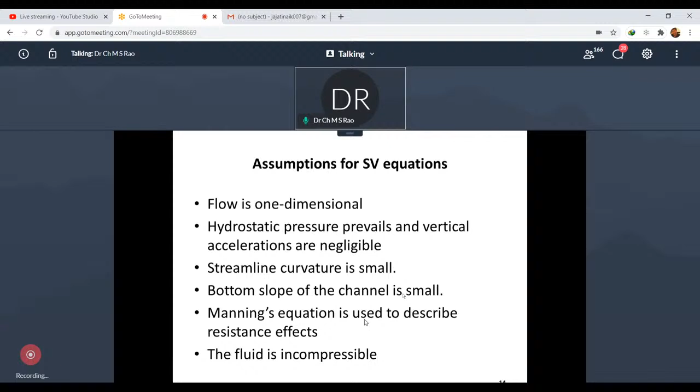Okay, and the Manning's equation is to be used. That means you are considering the surface roughness variations, vertical roughness variations, and the longitudinal roughness variation also can be considered in this particular equation, and the fluid is incompressible. So these are the assumptions that we usually adopt in these particular mathematical models.

So here, considering the various combinations of various floods, I'm giving a comprehensive summary here. So based on the momentum equation components, I can classify these things.

Of course, Professor Subhankar Karmakar from IIT Bombay has defined it like this, and many people are defining it like this in his NPTEL lecture. I've taken it from there, but whatever was told, everybody is saying the same.

So when SF equals S0, it is a kinematic wave, a steady uniform flow you expect there. When SF equals S0 minus del Y by del X, the flow depth variation, water level variation in the longitudinal direction, this pressure variation causes the non-inertial form, that is called diffusion and diffusive wave. And with S0 and the local convective acceleration, if you only consider ignoring the local acceleration, then you can say it is steady non-uniform. And if you take all terms, we say it is unsteady non-uniform flow, or a dynamic wave.

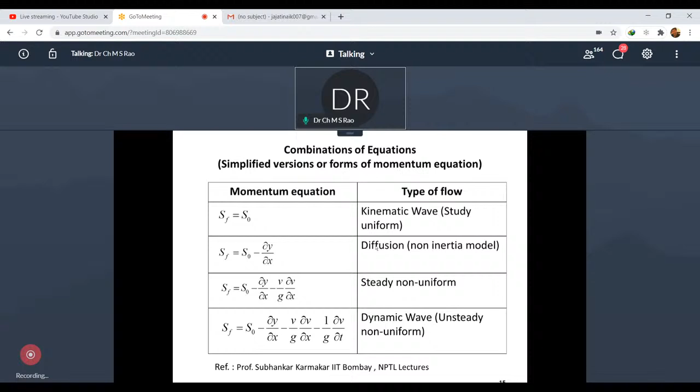These are the main flood waves, based on the momentum equation, derived from this St. Venant equation. As I told you, the gravity wave is only the flow of waves occurring on the top layers of the streams at a particular height due to slopes. For a zero slope and a considerable slope, these waves occur due to gravity forces prevailing in the particular river reach.

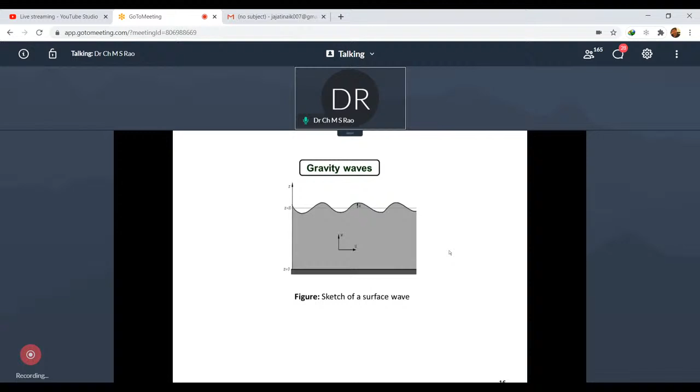This is the gravity wave. So you can now use this St. Venant equation and convert it into some other form also. Here I'm highlighting the dynamic wave into the conservation form. I'm replacing the del Y by del X with Y, the flow depth is replaced with the discharge. So Y and Q are interlinked, they have a proportionality relation, remember. So you can replace Y with Q and name it a conservative form.

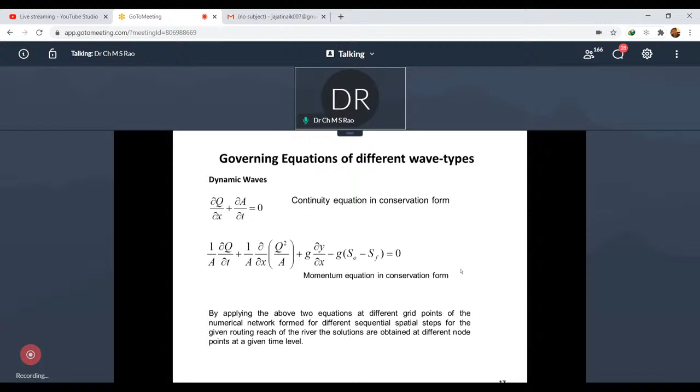Okay, whenever you use the discharge, that means you are explaining and calculating the volume of flow of the flood at the downstream side. Hence, it is a conservation form of the momentum equation and conservation form of the continuity equation. This is the one shape I would like to bring to your notice. Therefore, I brought this equation to my slide.

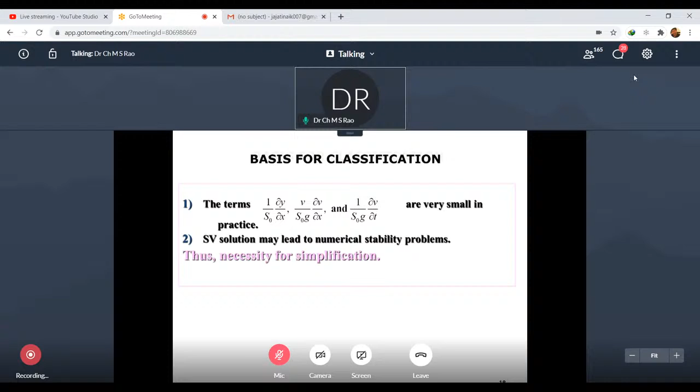So as I already told you, 1 upon S naught del Y by del X plays a key role, that means water surface gradient, the flow depth variation with respect to bed slope. Slope may be high, slope may be low, I will explain that more clearly. This term is very small, and that causes some instability in the St. Venant equations. They have to be taken care of while using these methods to compute the flood peaks at the downstream side.

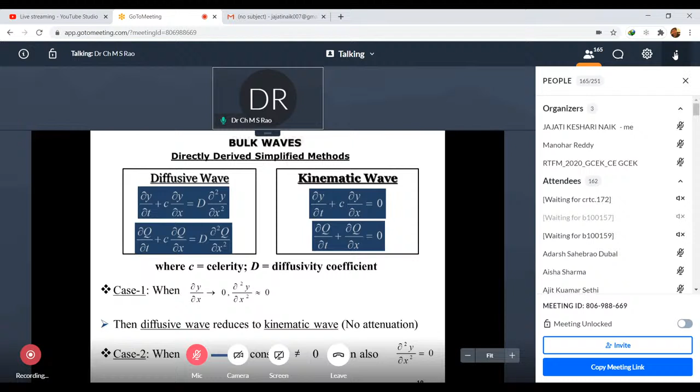Now, the other forms of these bulk waves are the derived equations of the St. Venant equation, and we name them simplified methods because the original equation is transformed using other mathematical functions and approaches. That gives certain forms, which are only used to estimate floods. Therefore, we call them simplified methods. You might use binomial series to change the original form, or Taylor series to convert into a finite difference scheme. So you are simplifying the original equation into a derived form, which has a shape that is used in the model to develop the algorithm and estimate flood peaks. Hence, those methods are called simplified methods.

Simplified diffusion waves have the celerity component as a coefficient, and also a diffusivity coefficient in this term. Whereas in a kinematic wave, as I told you, the diffusion wave ACD equation, the approximate convective diffusion equation, is a transition phase of a kinematic wave. So this diffusion term or diffusivity coefficient can be ignored when del Y by del X tends to zero. That is one case study we have seen. In that scenario, the higher order terms can be ignored, and under such situation, the diffusion wave can be converted into a kinematic wave. This is the transition phase of the mathematical function.

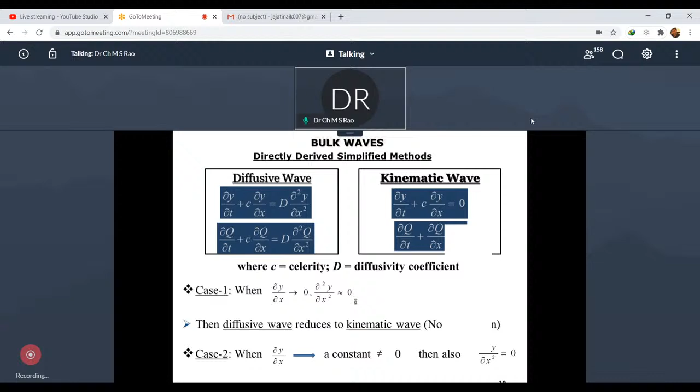So with this scenario, the ACD equation in conclusion shows that 1 upon S naught, del Y by del X, plays a key role, meaning the flow surface profile plays a key role in defining flood waves. This theory was proposed by my professor, my guide, along with his research scholar, and initially proposed by his own teacher, Professor Ranga Raju, who wrote many books on open channel flow and was vice chancellor of University of Roorkee, now IIT Roorkee.

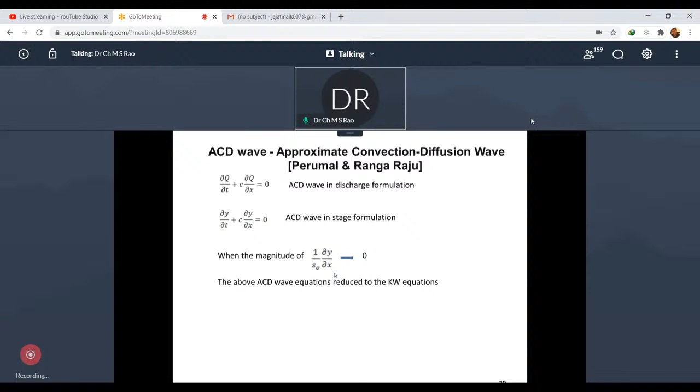So with this brief—I cannot say brief, it is a wide, lengthy discussion—we can now categorically define the various types of flood routing methods into three major groups.

One is using the ANN model, black box models. My student, Mr. Reddy, who is presently a coordinator, has done some work under me using empirical regression black box models—his results I will explain in my results chapter. Under my guidance, Mr. Reddy used a genetic algorithm approach to estimate floods, which I call a black box model. You give one input and get an output. By trade-off, you develop a weighing factor to match computed values with observed values, minimizing errors in the model. Finally, you get the computed values, calibrated values, which can also be used for validation. That's what people widely do using the ANN model, an algorithm-based model.

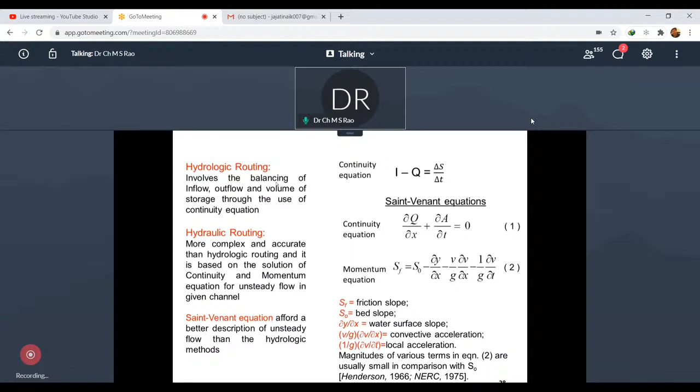So hydrological models in general, we call them time invariant models. They usually use the continuity equation, remember. That means the change in storage with reference to time is calculated by taking the difference between the input and the output. That's why hydrological models usually use only the continuity principle, remember.

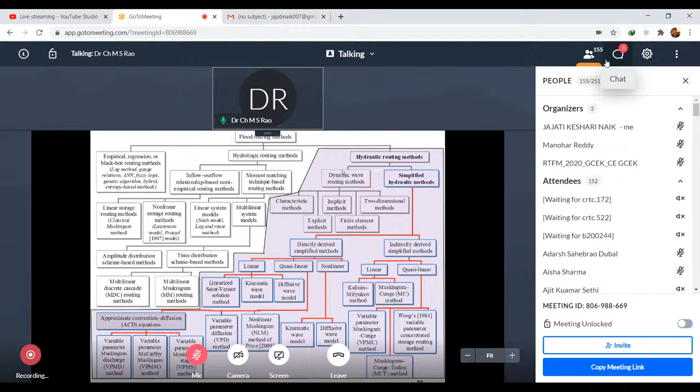Now when you go to the hydraulic models, we have categorically defined them in many ways: one is the dynamic wave, another is the kinematic wave type. There also we have categorically defined the methods in simplified modes, where the Saint Venant equations are directly used or indirectly used. In the directly used methods, we take the continuity equation and the momentum equation and use them in linear form and quasi-linear form.

It apparently is linear, but it is not linear, that is called quasi-linear. It means it is a non-linear phenomena, but not really non-linear, remember. So when you take a linear equation in one-dimensional flow and derive it to a certain form, we can maintain the non-linear flood behavior in a linear mode, so we call it quasi-linear. In that scenario, we have developed the variable parameter methods in a quasi-linear approach, finally developing the VPMM method by deriving the quasi-linear derivatives directly using the Saint Venant equation.

Apart from that, indirect methods also exist, such as the Kalinin-Milyukov method, where we use a particular storage equation with a kind of nonlinear approach, a power term, using some parameters in the nonlinear mode, and we optimize each and every parameter, computing the discharges at the downstream side indirectly. That is also a hydraulic routing method using the indirect approach.

With these major classifications, whatever is shown here, you will come back to class. Whatever method you see in the world now, it falls somewhere in this particular block diagram.

When you go into more details of the models, particularly VPMM etc, I want to remind you that the water surface slope defined along the reach, flow depth variation with reference to the bed slope, has a functional relation with the bed slope S naught, the surface characteristics meaning roughness, the initial flow depth available at that time, the initial discharge available at that time point, and also the time to peak of the flood and the peak discharge QP. That means the flood wave characteristics fully depend on the physical characteristics of the river.

That is very important. Any model developed based on these physical characteristics, we call a physical model. Whenever you use ANN and black box models, you don't talk about all these parameters. You don't bother about the surface characteristic of a river at that section, whether roughness is high or low, you don't know. The bed slope, whether it's high or low slope, you don't know. The initial base flow at that river location or basin, you also don't know. And the peak discharge, peak flow, how much it is, you don't know.

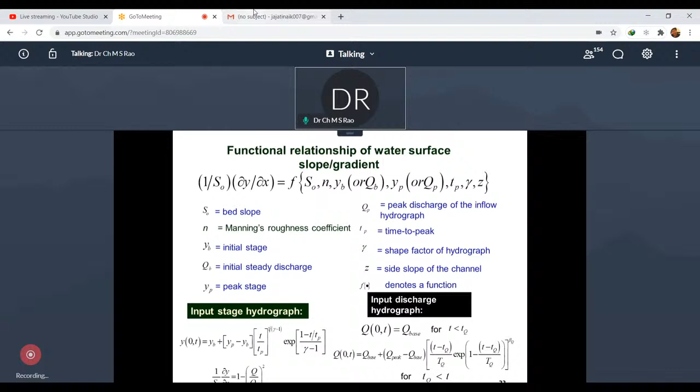And the symmetry of the flood, whether it is symmetric or asymmetric, whether it follows a gamma distribution or beta distribution, the shape or skewness of the flood, whether skewed right, left, or symmetric like a normal distribution - these characteristics of the flood you also do not know in the black box model. But still they are very popular because the weighting component governs at different layers to match the computed value mostly with the observed, recorded values.

And there you are trying to minimize the error using many algorithms like the Kalman filter techniques for reducing the error, or AR2 auto-regressive models, etc., or extended Kalman filters. There you are using these to reduce the error in the model. So therefore, they are also popular, but they are non-physical models, remember.

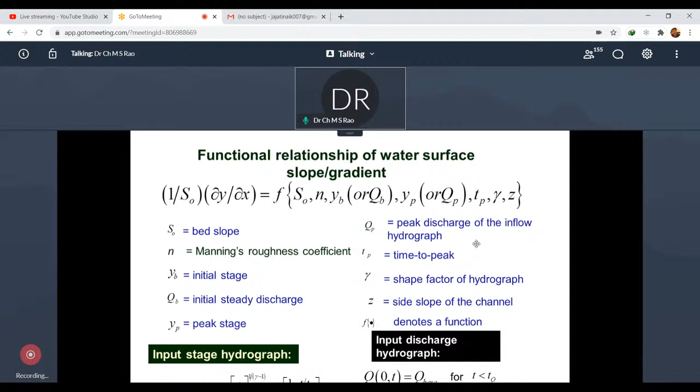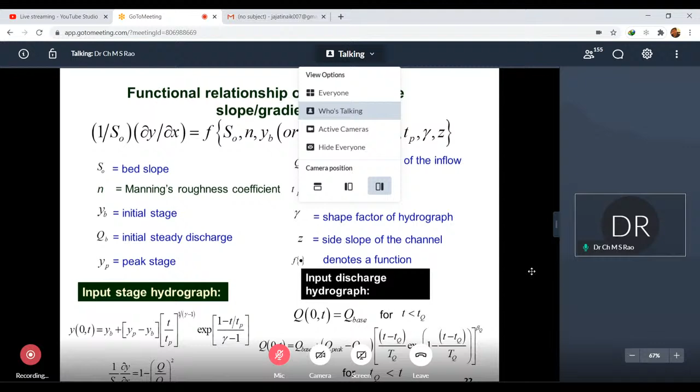But when you compare the results between the physical model and the heuristic models like the black box models, obviously you will see the difference because flood is a natural phenomenon. It's governed by local situations, the local acceleration, convective acceleration, bed slopes, surface characteristics, river bends, etc. So obviously, I guess not only me, many researchers guess physical models will give better results compared to the non-physical models or black box models, as I have already proved. Those results I'll be showing you shortly.

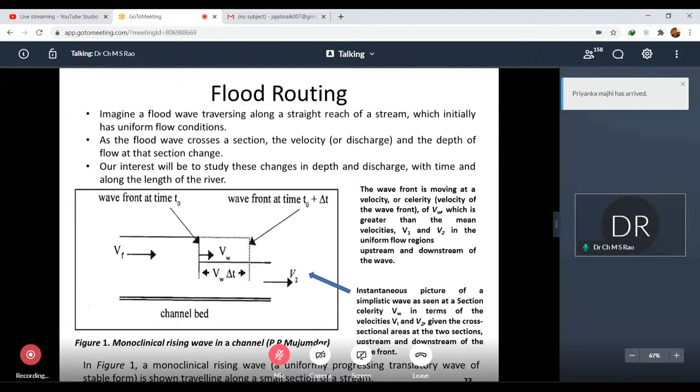With this, let us now go to the details of the basic concepts of flood routing. First of all, just at an instant of time, you observe a flood wave as an observer standing on the bank of a river. You just observe what is the V1 at that particular section at an instant of time t. Say here I call it t naught.

And after a certain time duration, say 5 minutes or 10 minutes, like delta t, maybe 30 minutes, etc., if you observe the wave front at a particular location, you will see three velocities at that particular channel location. That means you are imagining a flood wave traversing along a straight reach of a stream, uniformly, with uniform flow conditions prevailing at that particular instant of time. So you will see upstream side V1 flow velocities and downstream side V2 velocities. There is a change of velocities varying with respect to the locations, flow area variations, and cross-sectional variations.

The velocities get changed, remember. So in that process, between V1 and V2, you will see a wave celerity. That wave front gains a certain wave celerity. That wave front velocity will be governing the flow or the flood wave front. That type of flood, if you see instantly, you cannot see any attenuation in it. The instantaneous picture is shown here at a particular location. That type of flood wave movement, or wave front, we call a monoclinal rising wave front.

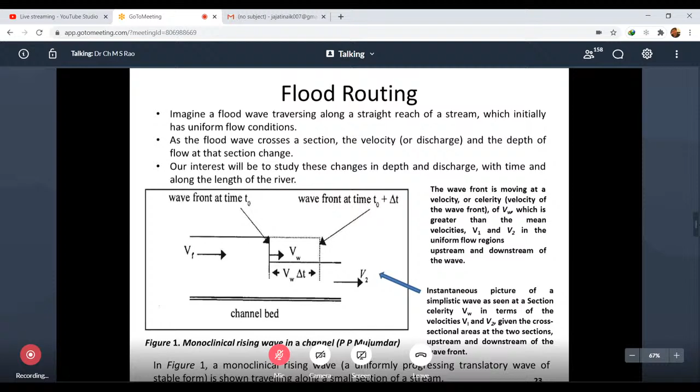At an instant of time, you will see uniform behavior of the flood wave, but with local velocities that are named the wave celerity, wave front velocities, consisting of the upstream velocities and the downstream velocities at an instant of time t. So here, if you see in the flood routing, you can see it is...

Unsteady flood flow with attenuations here, okay, because the area is changing. Obviously, the flood characteristics will vary. The flood peak comes down; it has to come down because roughness is varying. So outflow, that means the flood discharge wherever it is estimated at the downstream side, will show a certain difference here. It cannot be a monoclinal type of rising.

It is a kind of attenuation type of rising of the flood wave that you can see, due to unsteady characteristics that come into picture because of the non-uniform flow characteristics or gradually varying flow characteristics. So that you are trying to characterize and calculate using some methods.

Apart from this, as I said earlier in hydrology, this is the channel methods, flood routing in channel. Now I can say flood routing in reservoir uses only the continuity equation. As I already told you, these are all reservoir routing methods. So you have to construct one dam.

There you will ignore the velocities because water is stored at one place as you have stopped the flow. So velocity impact on the river will not be there; it gets nullified. The water is almost kept at a horizontal position. So you will only see the flow depth variation with respect to area variation, storage variations, Y variations, etc. But the velocity impact is nil. That's why the storage is calculated as proportional to a function of the volume variation only.

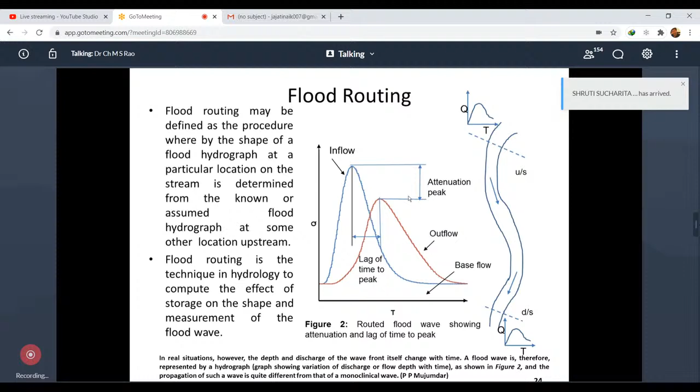Whereas in channel routing, you will see the storage variation is due to the difference between input and output in the channel. That is the main difference. There you will be using the momentum equation for calculation in channel routing, whereas in reservoir routing, you will be mostly using the continuity equation.

Applications of this flood routing are here: peak flow estimation, peak forecasting, flood forecasting, flood protection, flood warning you can develop after calculation of the forecasted values. You can develop some design water conveyance systems, show some protective measures, develop hydro system operations properly, and study water dynamics in ungauged rivers.

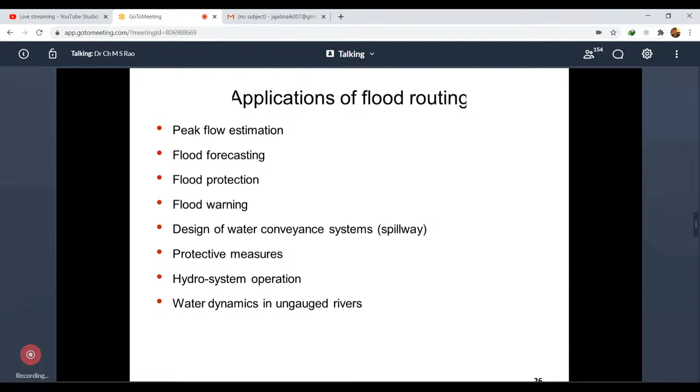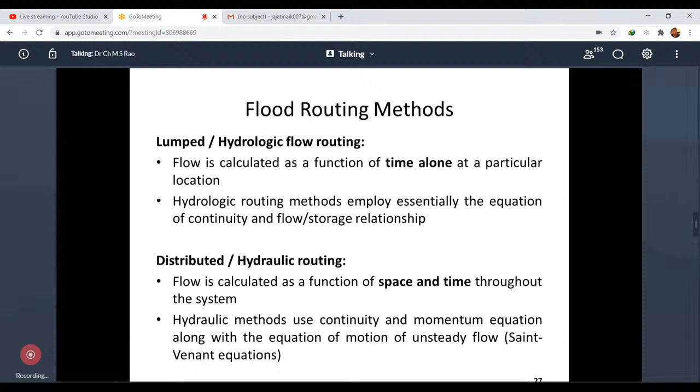Now, this I have already told you: whenever you use the hydraulic methods, it is space and time variant. When you use the lump method, it is only time alone variant. Remember, this I have already told you.

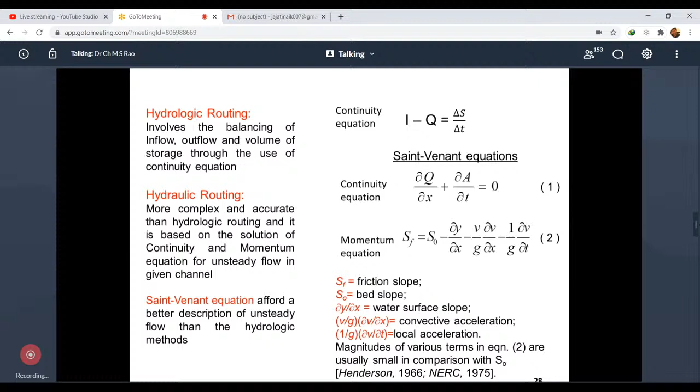Now, when you go to the storage routing, that is reservoir routing, as I already told you, storage is a function of discharge. So Q is having a function with the elevation, that is H, and storage indirectly is a function of elevation. So those things you are calculating at the downstream side, giving the information at the upstream side, that is inflow into the reservoir. You are trying to calculate the outputs as a function of time, and consequently the storage as a function of time; the volume of rate into and from the reservoir is also a function of time, and the flow depth variation is also a function of time.

These are the things you are computing, taking the reservoir as the system and input as an input hydrograph sending to the reservoir. So for that, you are using the continuity equation, calculating the input minus output difference as the storage for a given time interval, delta t. If you use that delta t at two time levels, the continuity equation will be referred like this: average of the inflows considered in that particular time interval, I1 plus I2 by 2, and similarly discharge Q1 plus Q2 by 2; the time average will yield the storage difference in that particular reservoir.

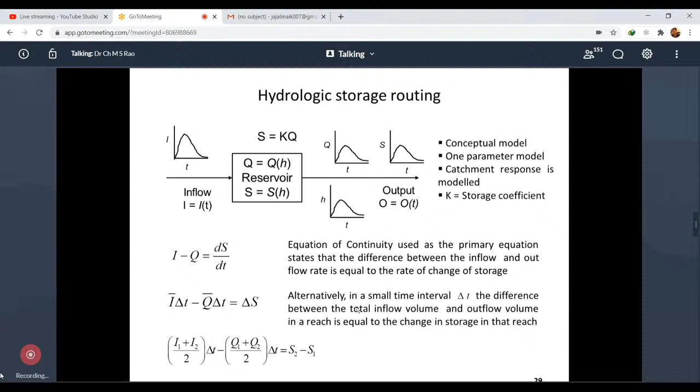So this is the hydrologic storage route. Go to the channel route. Again, I defined already, but the equations I'm now introducing here. So the channel routing will have two phases in it: one is the prism storage, the other is the wedge storage.

The prism storage means the bottom layers of the channel; it is always having uniform flow conditions, and the flow is also steady uniform flow, though during flood flow you can assume unsteady flow situations too. The unsteadiness you will see in the wedge form, but in the prism storage, since the depth remains the same, the storage of water in the river reach is made into two parts. So prism storage is proportional to KQ, whereas the top layers of the flood you will see in wedge shapes.

The reason is that there is some difference between input and outflow. Sometimes inflow may be more than the outflow, sometimes inflow may be less than the outflow. That means you will see the wedge shape change in the channel during the flow process while computing the discharge at the downstream side of the river reach.

So that will create different concepts like a rating curve in the river reaches, maybe normal during steady flow situations, maybe a loop rating curve in unsteady flow situations. During normal flow situations, you will see only one stage with reference to one discharge, whereas in rising and falling, dynamic wave flood situations, non-uniform flow situations, you will see at one stage two discharges, one falling and one rising. So this is the physical change that you come across in the channel routing process.

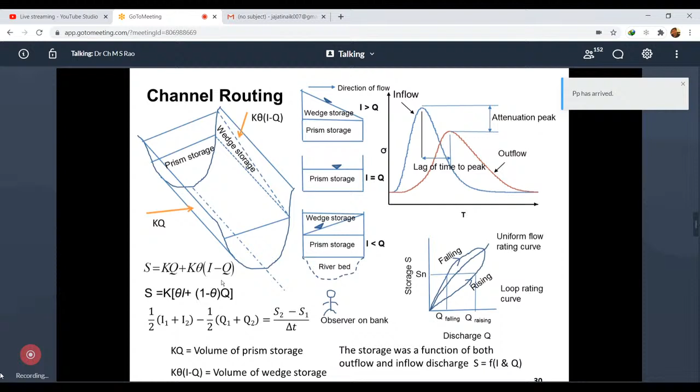Using that phenomena, you can develop two varieties of problems here. One is the direct problem and the other is the indirect problem. The indirect problem we can say is the inverse problem. That means you are using the input at the upstream side and computing the outputs at the downstream side, but estimating the parameters K and theta.

That is the kind of inverse approach. That means you know the information at the downstream side and upstream side, and you calculate the system parameters K and theta to balance the particular storage equation. Yes, that is one approach. We call it the inverse approach or indirect problem approach.

And the direct approach is where you don't know the output, you are calculating it. We say it is a forecasting mode of approach. So you know the travel time because it is already known to us, since the river has been observed for many years. So travel times may be known to us. And theta is the weighting factor.

You are assuming a certain value from 0 to 0.5. Usually for natural channels, we assume theta is 0.25 to 0.3. Based on this information, we will be calculating the outflow discharge at the downstream side. This is a kind of parameter estimation. Under this name, we do this.

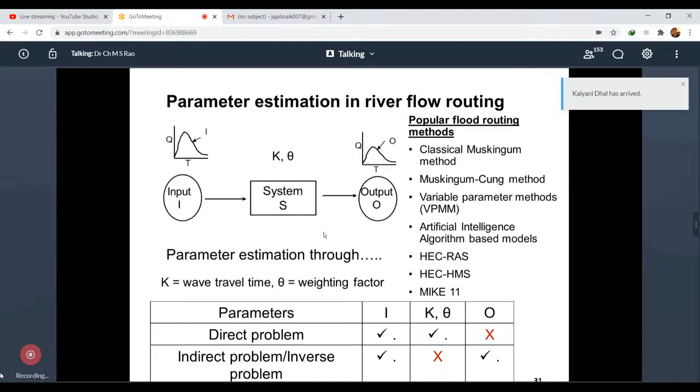Next, another classical method already told you - this is what the Muskingum method was when he developed the hydrological method. The same thing. Here I am trying to explain all these things with reference to the theta variations. So you see theta ranging between 0 and 0.5. Sometimes theta, the weighting factor, is equal to 0.

That is applicable only for reservoir routing. Whoever does channel routing, they don't assume theta as 0, remember. If it is the reservoir routing approach where storage is proportional to K times Q, then you can take theta as 0. But for channel routing, theta cannot be 0. It may range from greater than 0 to 0.5. For full wedge, fully established wedges, it goes up to 0.5. That is possible. When theta is going to 0.5, it is almost kinematic.

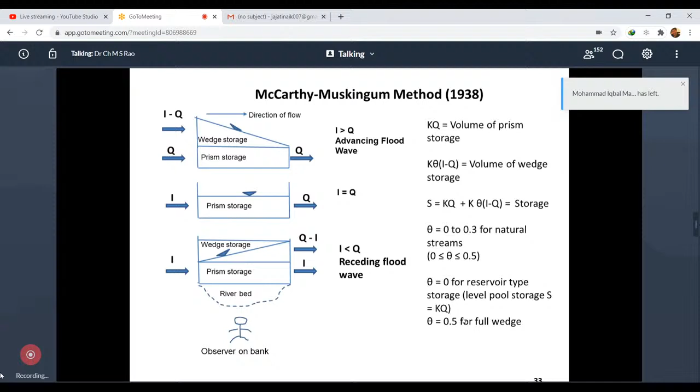If it is 0.3, 0.25 or something, it is a natural gradually varied flood wave or dynamic wave flood. Remember, in natural Deccan Plateau rivers, we see theta ranges between 0.3 to less than 0.3 or 0.35 maximum. But in glacier rivers, you see kinematic wave situations like the Kedarnath flood event, the theta is almost touching 0.5, remember.

So this is still Muskingum's method. Once you take the storage equations of the prism and wedge storages at time level 1 and time level 2 and put it in the continuity equation and solve it, you will get a routing equation. You can calculate the discharge at a next time level in the form of a forecasting mode.

So one can easily calculate the discharge at the next time level, giving the information at the previous time level and the next time level - the input as inputs, and calculate the next time level output using some coefficients derived when you have substituted storage at time level 1 and storage at time level 2 in the continuity equation. The coefficients C1, C2, C3 will be derived in terms of K and theta, and their sum should be equal to 1.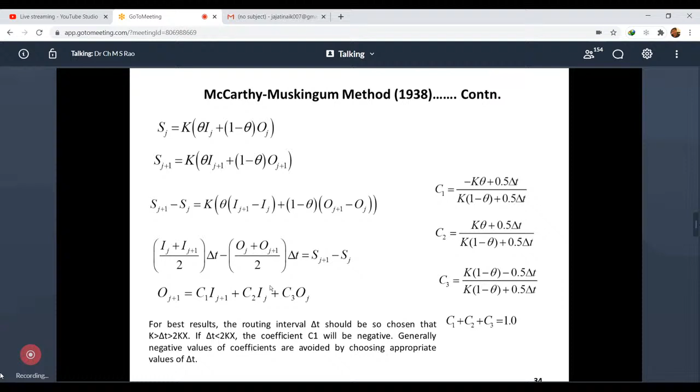Okay, so I showed you some drawbacks which you cannot see in the literature. Sometimes theta is negative here, meaning outflow is occurring inside the inflow. This model has certain drawbacks.

This was explained by Professor Perumal in one of his papers. This logic is that sometimes theta is 0. Earlier I said theta is 0, so storage routing can be used. But sometimes theta is negative also.

That is caused due to insufficient reach length considered, or not maintaining proper reach length to compute the discharge at the downstream side. In that situation, theta goes negative. Otherwise, if sufficient theta is established, the outflow will be slightly crossing, intersecting the peak value of the outflow on the recession side of the inflow hydrograph, at a little distance away. Remember.

It is much similar to this. The same logic is now used in the SWAT model. This model people are using nowadays, based on the classical Muskingum method, but in the form of the Muskingum-Cunge method. Muskingum-Cunge revised the classical linear method into a nonlinear fashion, using a time-variant method.

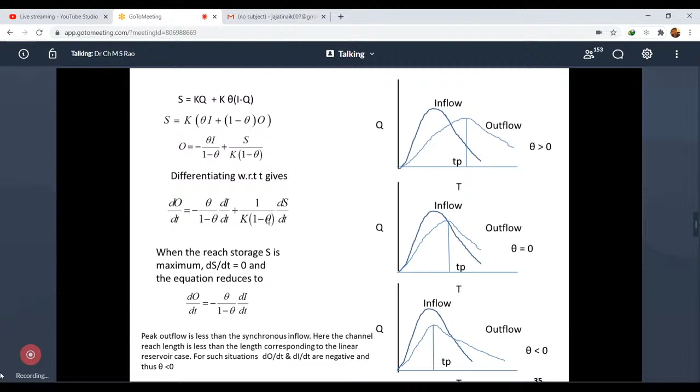Actually, the classical method assumes only time invariance, where delta t is fixed. But the parameters estimated in the classical method are for that particular time, so they are not varying. What Cunge proposed is that he computed all discharge values in a time-varying mode, suggesting the Muskingum-Cunge method, which is used in the SWAT approach.

They also developed the routing equation with certain parameters in another mode, unlike this Muskingum, but calculated the travel time K as L by C multiplied by 1000, where L and C are respectively the channel reach length and the celerity, considered here as 5 by 3 times VC, where VC is the velocity.

Flow velocity is considered in that particular river reach to calculate the discharges at the downstream side. So this is also used as a component model in SWAT to compute the discharges in a basin model. Remember, basin model. Their coefficients are also like this, and their formulations will be shown in that particular software.

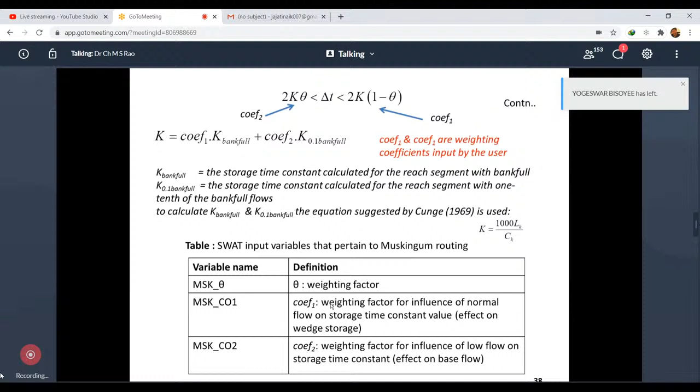But the main drawback here is it is a constant parameter Muskingum. Though it is a time-varying approach they are adopting, they take the reference discharge, which includes the average discharge in the river reach. That means the inflow and outflow are taken in an average mode, and they add the base flow coming into the river, naming it the reference discharge.

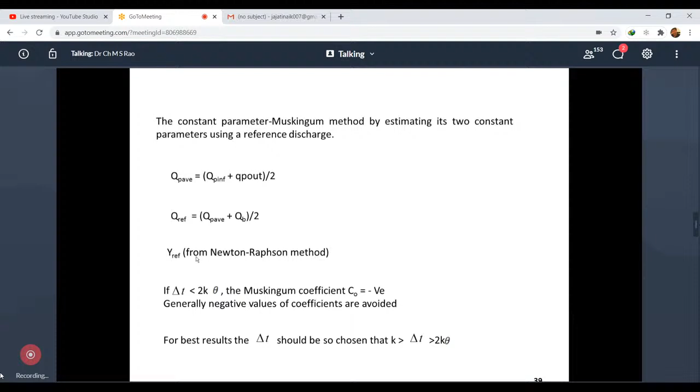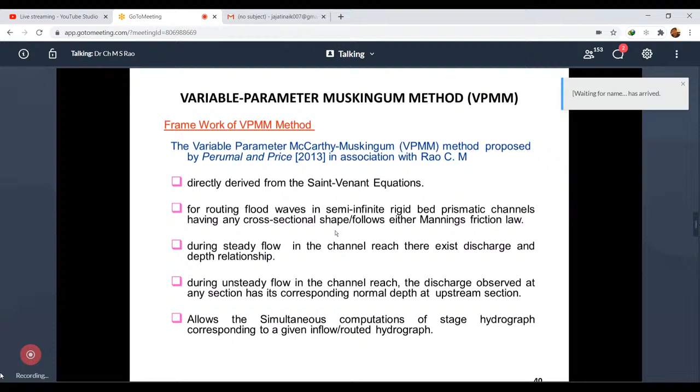That reference discharge is used to compute the flow depth existing at that particular location using a Newton-Raphson approach. That means they use the discharge information to compute the flow information in the Newton-Raphson approach, calculate flow depth, supply it into the model, and finally calculate the result. So whoever uses this SWAT model for river basin analysis has to be very careful about the constraints existing in that component model, known as MRM, remember.

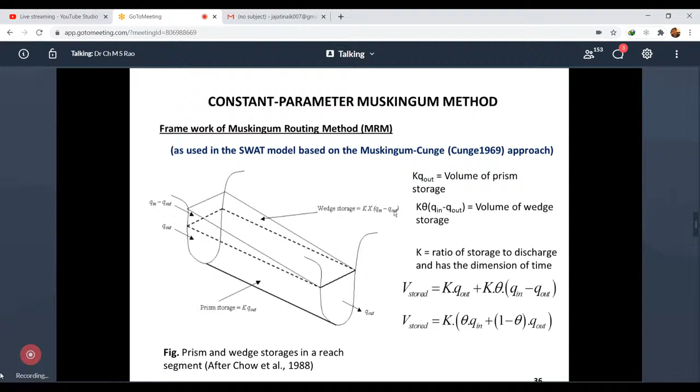Okay, Muskingum routing method - of course it is the Muskingum-Cunge method. So considering all these drawbacks, myself and my professor again thought of expanding this kind of derivative, basic fundamental equations into another form, naming it the VPMM method to compute the discharges, again named as a directly derived hydraulic method, remember - a hydraulic method or flow routing method.

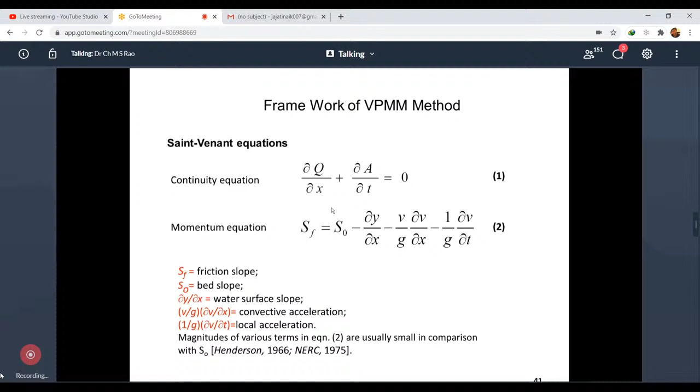So again we are using the Saint-Venant equations as the base model, with certain approximations in a river reach. Section 1 is the upstream reach, section 2 is the downstream reach. So I'm considering a river reach of distance delta x, maybe 5 kilometers, 1 kilometer, 3 kilometers, 10 kilometers, 20 kilometers, like that. I already told you river bends have to be managed.

So delta x has to be selected based on the natural existing topographical conditions. Remember, I will talk more on these delta x approximations a little later. So reach one, node one is upstream; reach two, node two is downstream side. If you take the middle of the reach as M, the middle of the reach is delta x by 2.

Now we have introduced another cross-section location, node level at section 3, that is in between the middle reach and the downstream reach, that we have named as a normal section. It means a river in a dynamic process.

As I told you, in the prism storage, you have already seen the characteristics. Okay, only the top layers have the prismatic section, the wedge-shaped structure.

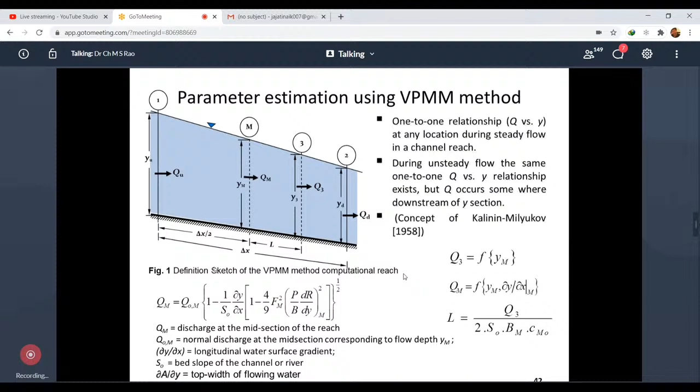Considered under unsteady flow situations, with these assumptions we have calculated the downstream discharges using a particular grid approach - finite difference schemes, making section 1, section 2, and section 3, and the middle reach. So reach length is taken this side, and delta t is the routing time interval, beginning at the j time level, ending at computed time j+1.

So to reach this j+1 time, we will first calculate the information at the middle of the time interval, and supply that to the next time level. That means a central difference scheme approach we developed to compute the outflows at the downstream side, given the information at the upstream side, and in between computing the information required at the third section and also the middle section.

That has developed using the Saint-Venant equations, converted and substituted into a binomial series, which led us to develop a routing equation at the j+1 time, the next time level, taking the information at the jth time level along the flow direction and the time interval time scales.

So these are the coefficients of the inputs - this is the second coefficient, this is the third coefficient. All this information resembles the equation of the McCarthy-Muskingum method, already discussed as the classical Muskingum method. Remember that.

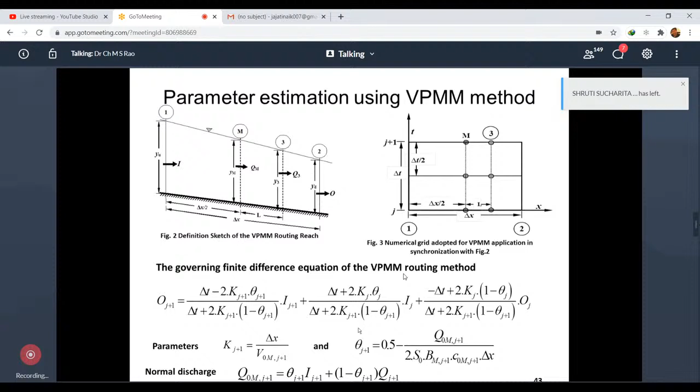This is my summary of the final equations, which we have used in simulation mode, not in forecasting mode. Forecasting mode is another concept. If time permits, I'll go into it, otherwise I can skip that.

So the Muskingum routing equation that is developed resembles, in the form of discharge, the discharge we are computing at the downstream side at J plus 1, the next time level, for a given time interval with the coefficients already mentioned, which include the time interval as well as the k values and the discharge at the upstream side and the input.

That means the input at the upstream side, at the previous time level and the present time level. I am calculating the current time level discharge using the discharge at the previous time level information, similar to the McCarthy method.

That's why this variable parameter, K and theta, are varying, hence its parameters are varying over time. Therefore, we have respected the Muskingum method, though it is derived by us, we respected the works of McCarthy, who proposed this original beautiful model and gave it to the world.

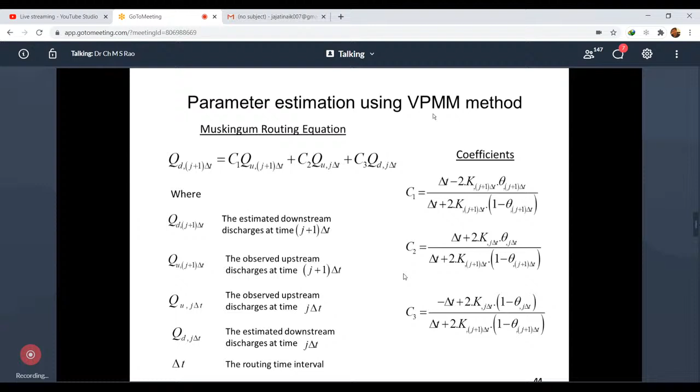He worked this concept on the Muskingum river. Muskingum is a river, not a person. Remember, it is a tributary of the Ohio River. So he named it the Muskingum River equation. We have respected him and named it VPMM, the variable parameter McCarthy Muskingum method.

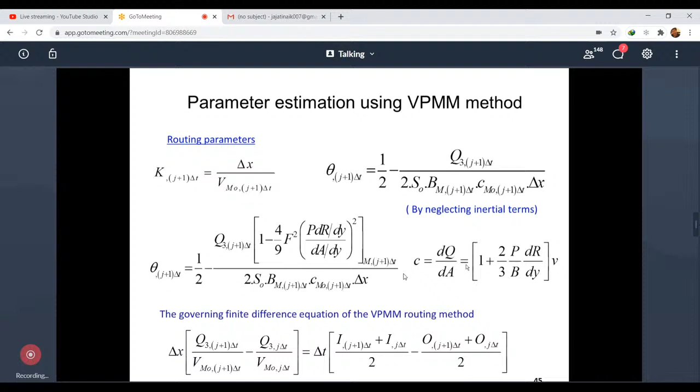So that we have used and calculated. These are some other forms of the K values and theta values, which include the flood, the Froude number. If you want to calculate the celerity, these are the forms of the simplified method. Originally started from the continuity equation and the momentum equation, St. Venant's equations. So these are the forms of it.

So any model that is developed, one has to verify it with certain evaluation algorithms and measures. We have calculated the discharge errors, time peak errors, mass conservation checks, and the efficiency of the model, and the corresponding flow depth variations, time peak variation, and the corresponding flow efficiency of the depth calculations. So we have calculated all these evaluations, checked the model performance using all these correct evaluation methods.

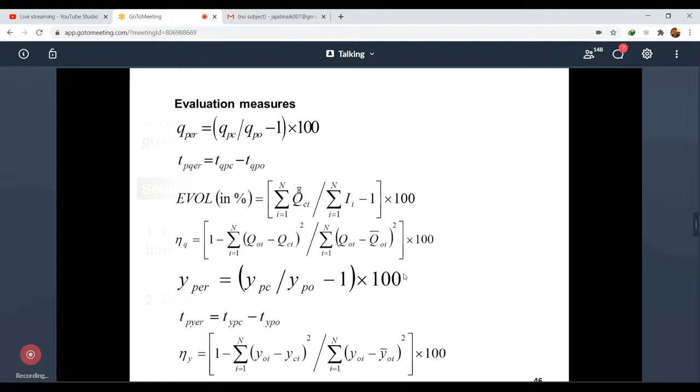After that, we wanted to compare this model with the already existing popular model, that is MCT, Muskingum Cunge Todini method. Actually, the Muskingum Cunge method, whatever I told, was again revised by Todini. And of course, that Muskingum Cunge Todini method is also one of the popular methods developed in 2007, but it is originally brought from Price, whom I worked along with my Professor Perumal.

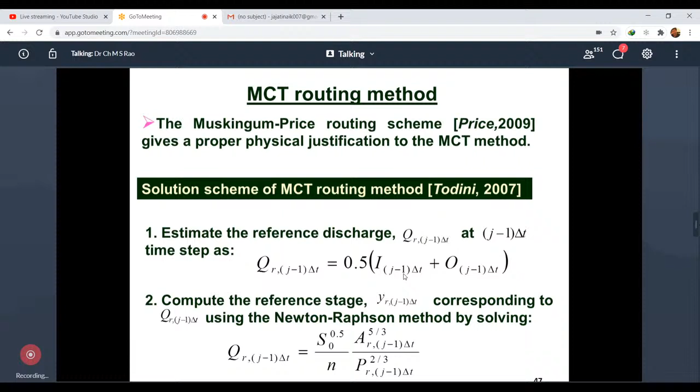That method now has a little basis from Price's original works and developed certain assumptions. He is also using the reference discharge concept with constant parameters, and with certain correction measures he applied to calculate the discharges at the downstream side. So these are the corrective measures he applied, with correction and without correction, and he worked out and developed one routing equation.

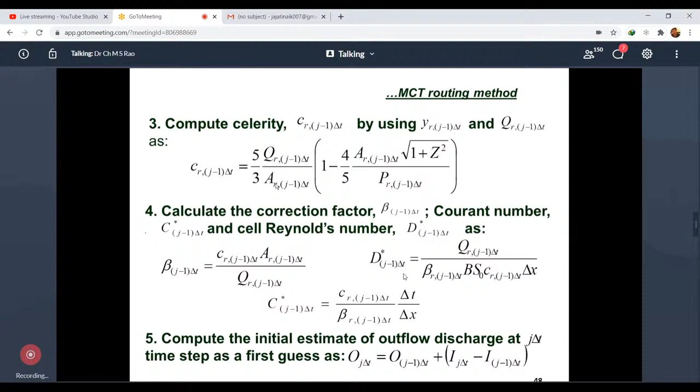His derivation, whoever wants to ask, I can support them, but all these derivations I can discuss at a later phase. I'm just elaborating what others did and what we did. So some corrective measures he explained and developed some algorithm, and calculated the coefficients like us, but with correction and without correction, that is the D star value and C star value.

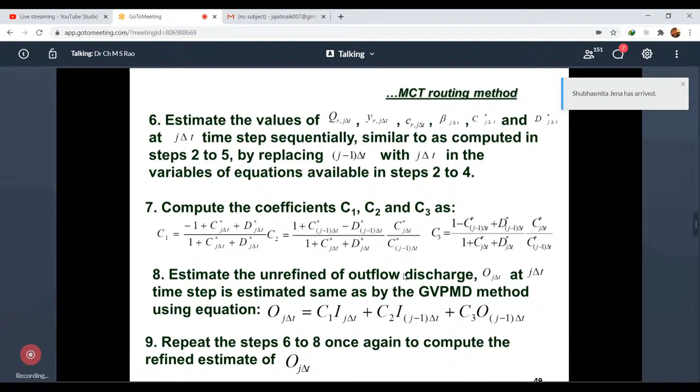Correction factors he introduced to get the correct answers, but it's a kind of cumbersome approach he developed. And he computed the results. At the same time, his model cannot calculate the discharge and the stage at the same location. He will compute the discharge at the downstream side and the depth at the upstream. That is the drawback of this method.

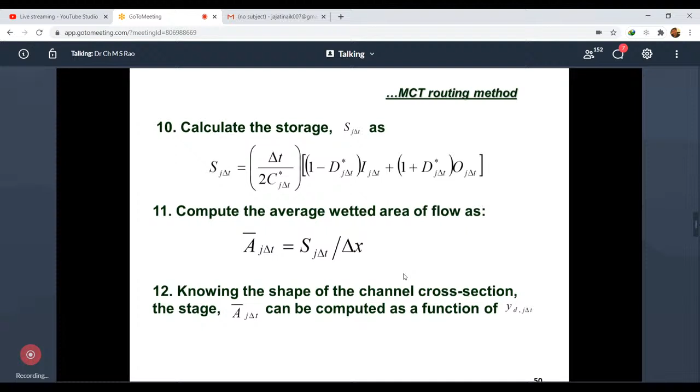Similarly, even if you use Mike 11, Mike 11 also has got similar drawbacks. I will explain that to you later. Whereas in VPMM, we can happily calculate the discharge and the stage, that means the flow depth, at the same location. That is the beauty of the VPMM method.

Apart from these physical methods, now I will touch upon what the coordinator, Mr. Reddy, did under my supervision. Of course, he has only picked up the genetic algorithm for his work. He has not touched the other black box models because of the time constraint he had with me during his MTech period. So we can compare these models with the non-physical models.

That is, artificial black box models, which I can name as artificial intelligence applications. So we have done some work in that also, and we have run the models of genetic algorithm, differential evolution techniques, particle swarm optimization techniques, and harmony techniques, using the important routing equation in nonlinear form.

You see the storage equation, whichever is visible to you here, has a power term, which is nothing but a nonlinear form of the storage equation. Nonlinear form of the storage equation. Here the K and theta, we have already discussed.

They are the parameters, and we have introduced another parameter, the m power term. If m is equal to 1, this becomes the linear equation. Using this storage equation, you can develop algorithms and apply black box models like neural networks to compute the discharges at the downstream side.

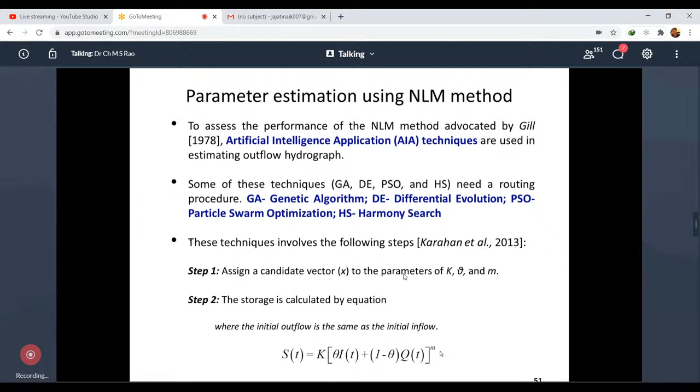You don't give any river reach length, you don't give surface roughness, you need not give channel characteristics, anything. You can only give the input and know the output. Already recorded values are used to do computation with weighting parameters, updating, and mapping the computed versus the output by minimizing the errors. That's another approach, and this algorithm is nonlinear.

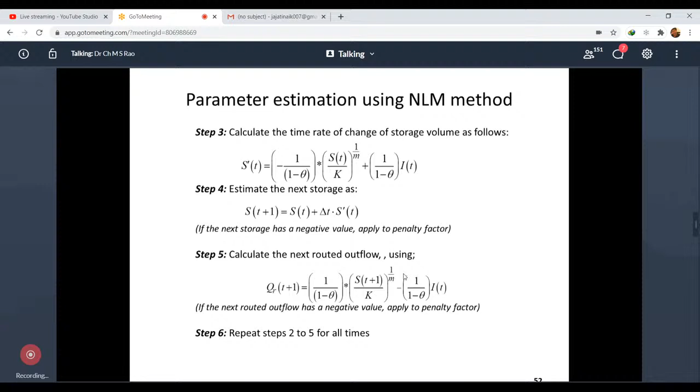We have already developed it and published it too. Apart from all these things, just to explain the method, we have the explicit method, implicit method, and grid approach methods defining different schemes. They use this Saint-Venant equation.

One is the 4-point method. In the explicit method, algebraic equations or linear mode are used, and you calculate the dependent variables explicitly at given time points. Whereas in the implicit schemes, the dependent variables are computed in implicit mode in a nonlinear form, using space and time discretization approaches. We develop a grid in spatial and temporal directions and calculate the parameters.

So these two are also available as benchmark models. Mike 11 uses the 6-point scheme, an implicit scheme, while HEC-RAS uses the explicit scheme. Remember, for your information, I am mentioning these things.

For our model, we have compared it with this implicit scheme, that is Mike 11, and also Saint-Venant's model. That means the benchmark models are Saint-Venant's model, which is algorithm based, you need an algorithm code for it. HEC-RAS is freely available, and Mike 11, from DHI people, is freely available sometimes, or available on purchase mode. So people can use any model to compute the discharge rate at downstream sites.

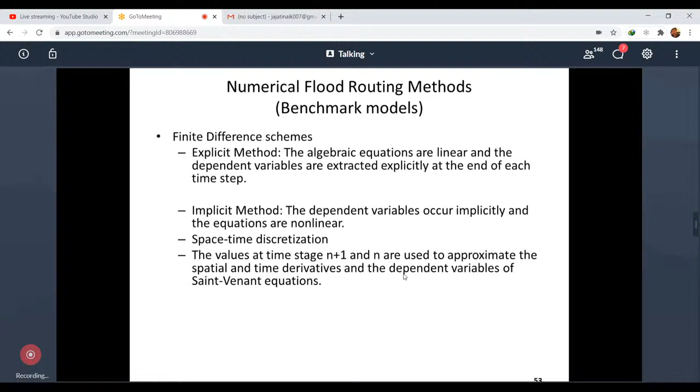Yeah. Study investigations, I would like to just show. These are the methods which I have shown you. Now I'll go to some investigations, in a nutshell I will show you. I think the time is running, now it's 11:52, I think I will rush to it.

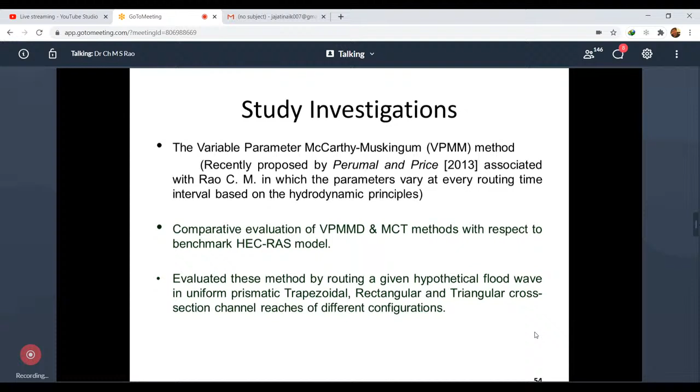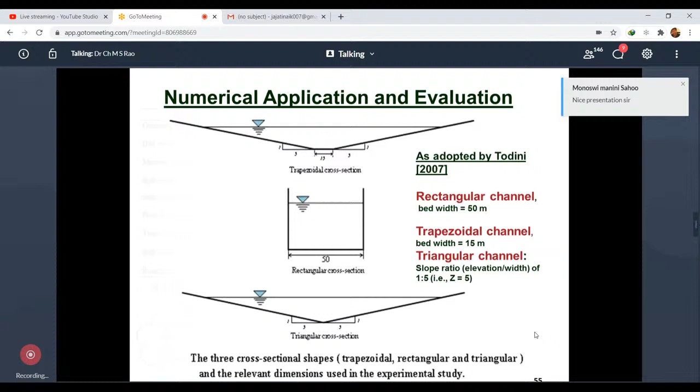So with this particular submission, I'm now moving to the investigations I have done and want to show you the difference between physical models, non-physical models, and all models whatever I just talked about. Yes, come here. Some applications, we have taken some hypothetical case studies. Channels we made as rectangular, trapezoidal with different varying sections. Slopes, side slopes we have varied, bed width we have varied, and rectangular, trapezoidal, triangular sections we have varied with this particular combination of flood situations.

Bed slopes we have varied. You see, 002 is the high slope. I told you, I will be telling you what is high slope.

1 in 1,000 used for the high slope, and 1 in 10,000 for the low slopes, which is 0.0001. High slope is a steeper slope, like a glacier river. A Himalayan river will have the high slope, 0.002, 0.003. Remember, 0.001 is also a steeper slope. The mild slopes are 0.0005, 0.0004, and so on. This is the bed slope variation.

So you are creating the channel, varying the slopes, and the roughness from low to high, 0.06 for high slope. You can go up to 0.09 also - yes, we have gone that far. Here I'm showing up to 0.06. 0.01 is a smooth surface, like a glacier surface. In between, 0.035 is a natural river surface roughness.

And for reach length, you have taken one reach, meaning upstream to downstream is only 1 kilometer, 2 kilometer distance, 4 kilometer, 6 kilometer, 8 kilometer, 12.5 kilometer, up to 33 kilometers that we have seen.

Because every model is a mathematical model, and delta x is a varying parameter, it has its limitations in approximations. You cannot take 100 kilometers at a stretch and run it like in Mike 11. People are running it over a 100 kilometer stretch, but they are taking delta x as 1 kilometer, or delta x maximum 2 kilometer. Our friend will explain that.

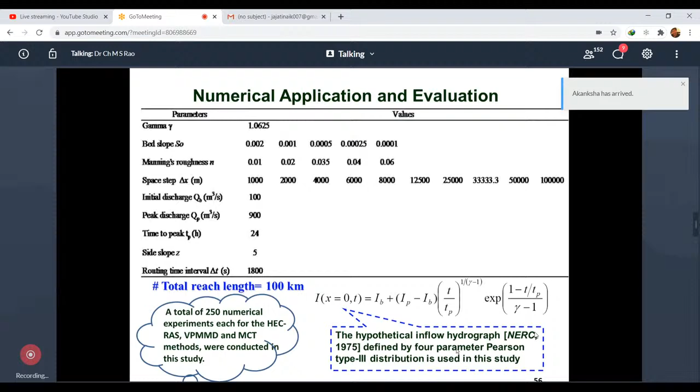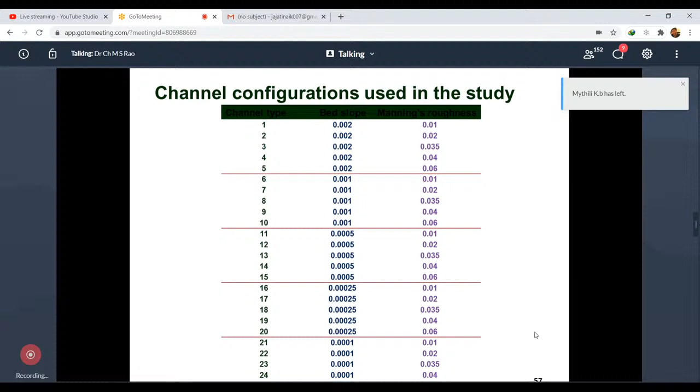These are the channel configurations we have developed with varying slopes, high to low, at varying roughnesses, across 25 different channels, and compared the VPMMD discharge model with the Muskingum-Cunge-Todini model for a reach of 100-kilometer stretch. We worked out and saw that our model is showing a purely mass conservative behavior.

Muskingum McCarthy model - you see the red dots, the mass is totally conserving, whereas in the MCT model, mass is not conserving exactly but with slight modifications, slight errors in mass conservation. But a 0.5 error is not that much difference - remember, that model is also a mass conservation model. When you take volume as the consideration, you don't bother about these small errors.

But when you take depth into consideration, you cannot ignore these errors - remember, this is what people should be aware of. So we have taken 1 upon S naught, del y by del x. I told you this is a flow profile referred with the parameters.

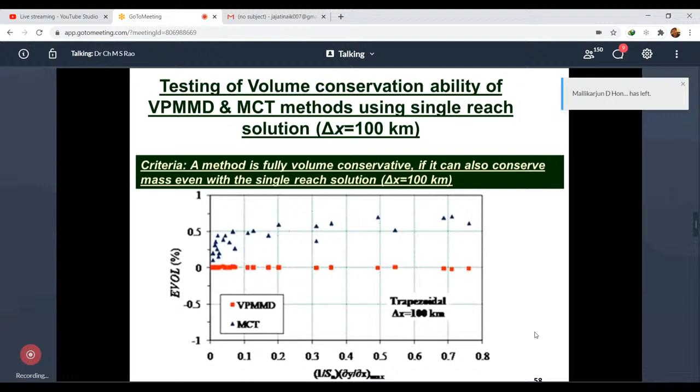Whereas that model MCT cannot do that. This speaks about the performance of the model overall, computed versus observed. Here I have taken observed as the benchmark. At later pages I have taken Saint Venant.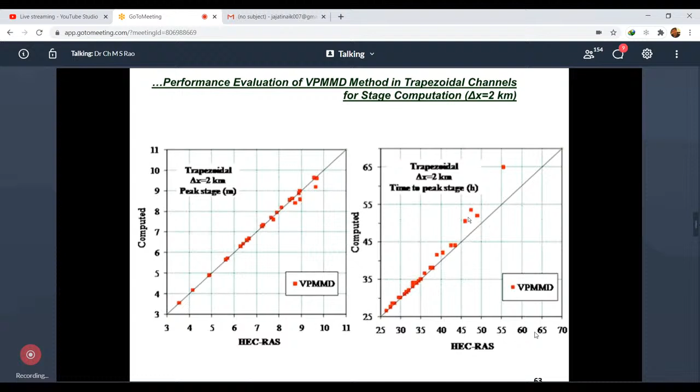These are other evaluations in the trapezoidal section between MCTs.

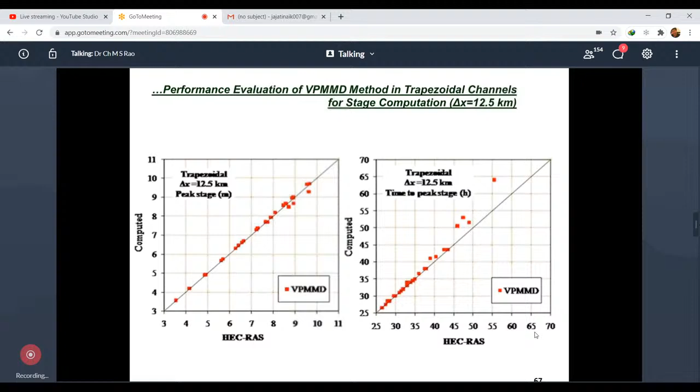I'm showing this at a glance because time is going on. These are all various results that we analyzed at different reach lengths. Now it is at 12.5 kilometers, meaning the reach length is increased to a higher length. Remember, here also, in terms of volume conservation we are superior over the other methods.

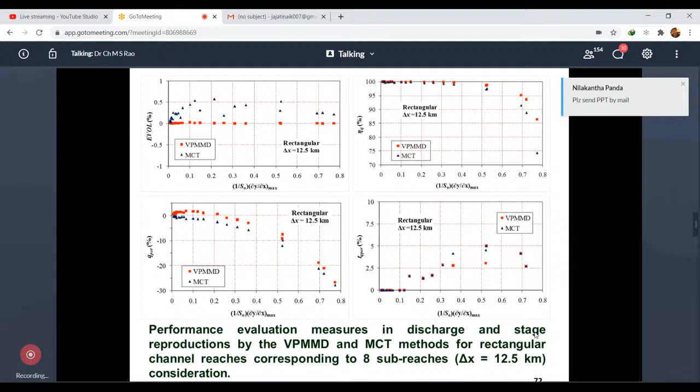Similar behavior at 12.5 kilometers. Just to give a glance, please see.

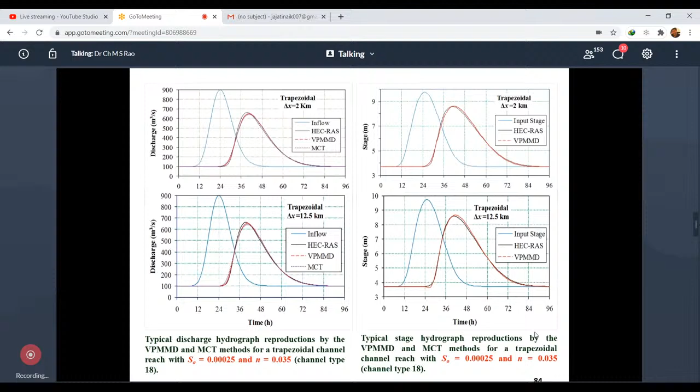These are the discharges, the hydrographs that are computed, matching with the MCT and the observed values at 12.5 kilometers and at 2 kilometer stretches, with the slope taken at 0.00025, and the natural channel roughness at 0.035, which we have picked up.

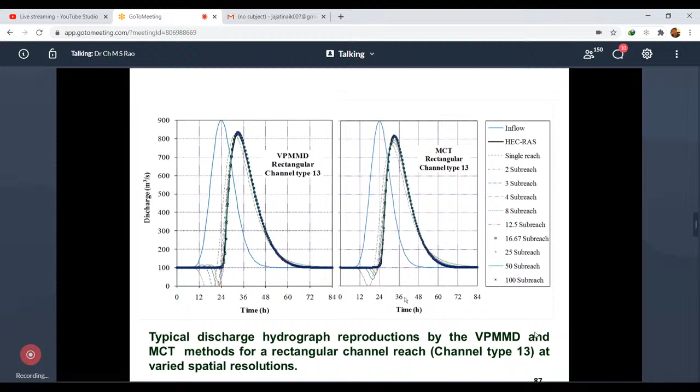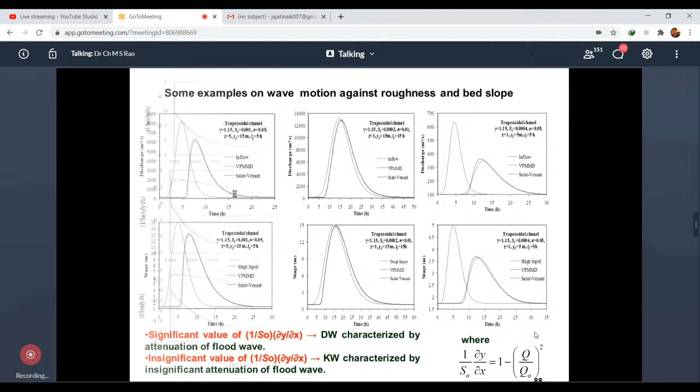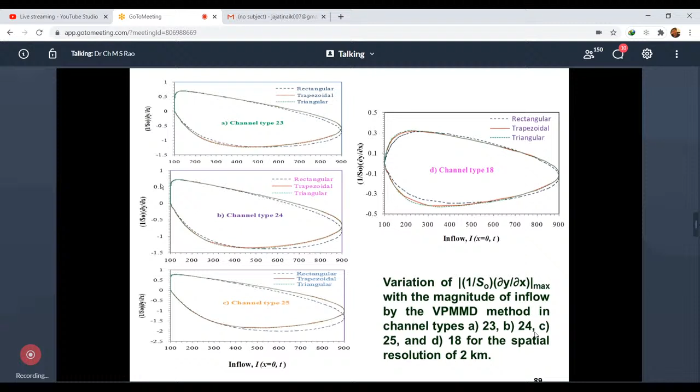So this is one upon S-not calculation for different cases to find out the applicability criteria of the method. We have worked out these things for different channels; you can see the applicability criteria. We fixed that one upon S-not del y by del x is at 0.5 and above.